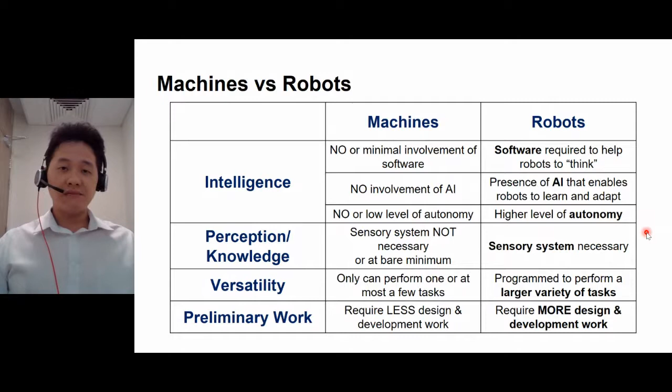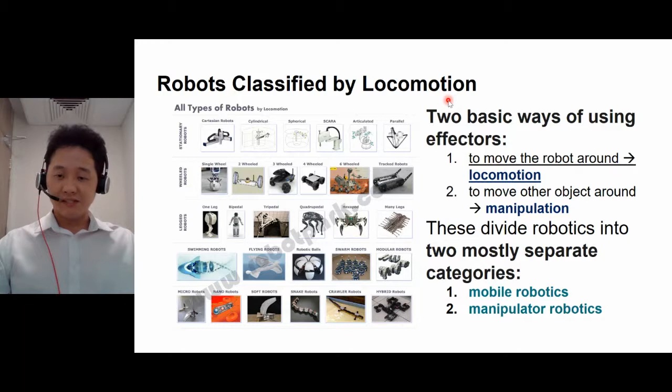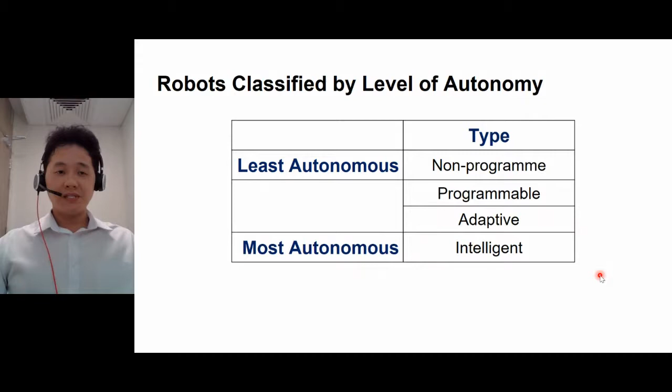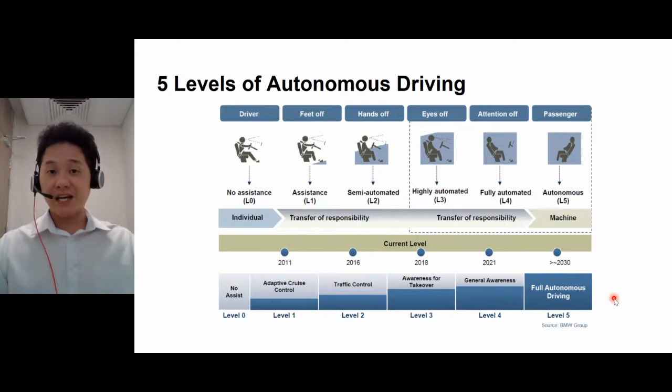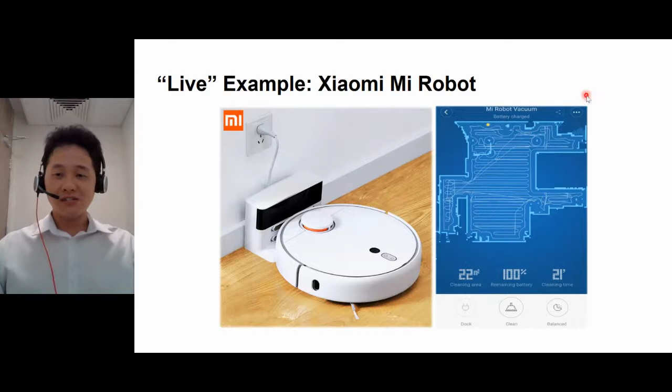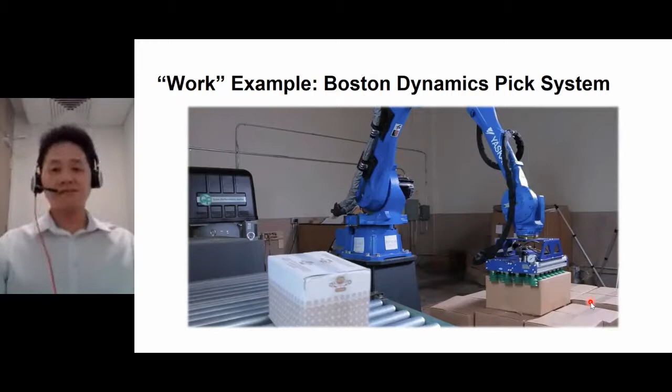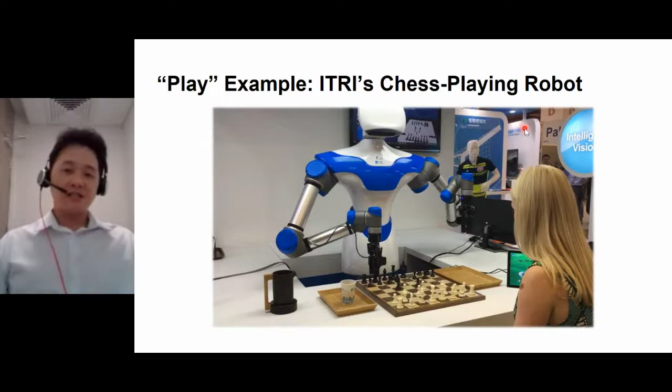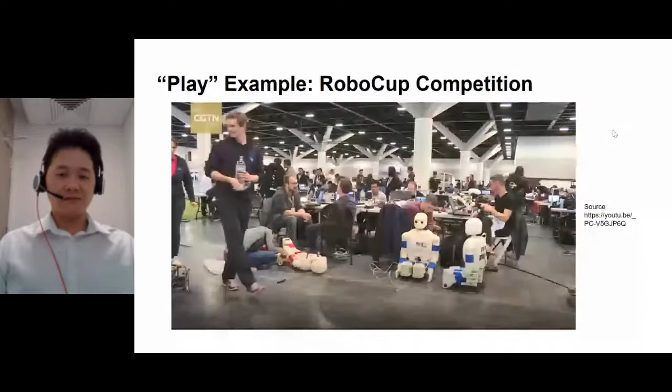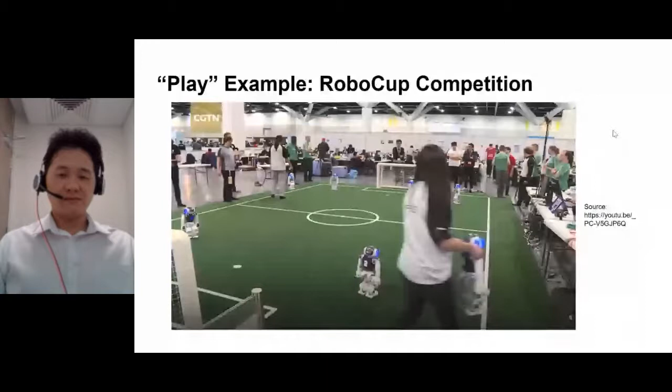All right, so I hope you enjoyed that video. Hopefully this will work out, that maybe in the near future we're able to see a group of robots playing soccer with each other, as an option compared to watching the Euro Cup or the World Cup. Maybe we'll have a robot cup on the international level.

So that's all for the present application. Right now we'll move on to the futuristic ones, in the same three categories: live, work, and play.

Under the live category, robots that can help us do our household chores. Currently it's not available, but I believe in the near future it will be possible, especially robots that can be involved in the healthcare industry and also act as a social companion to the elderly. I believe this is currently in development and hopefully it will be commercialized soon.

Last but not least, under the live category, level 5 self-driving cars. To my knowledge, Tesla recently announced that they would build a team to move towards this direction, level 5 self-driving cars. Later on I have a video to illustrate some examples of the level 5 self-driving car, but of course that's based on a science fiction video, so bear in mind.

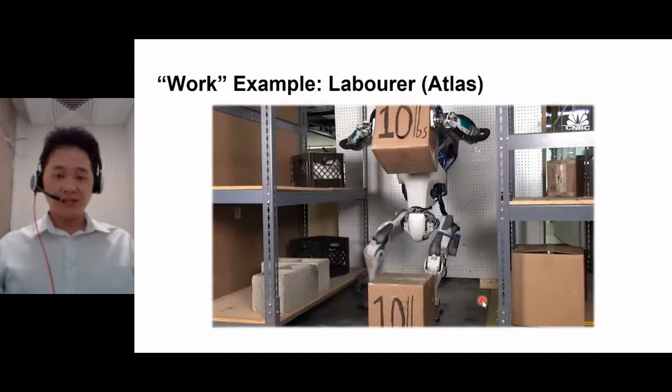A very brief synopsis is that this movie is based on a future event whereby robots replace humans in the wrestling ring. Instead of having humans in WWE or MMA events, we have robots fighting each other, and this keeps people entertained. I'm not sure whether this kind of entertainment will come out anytime soon, but hopefully it will - that would be very interesting.

So that's all for the examples of applications. Right now, just a brief introduction of some state-of-the-art technologies, to give you an overview of some of these technologies used within intelligent robots.

So firstly, the LiDAR sensor - it means Light Detection and Ranging. The LiDAR sensor helps the robot detect nearby obstacles. The mechanism is that this sensor, if it's a 360 type, will keep rotating, and while rotating it will shoot out light beams, hit objects, and receive the reflection. From this data, it calculates the distance of the object from the sensor.

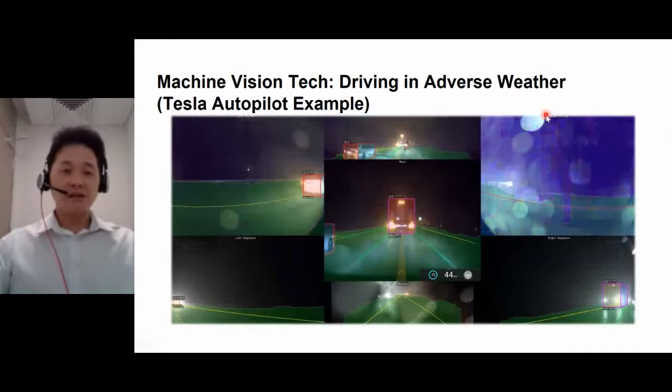Following which, we have machine vision technology. I take this example from Tesla Autopilot, an autonomous vehicle. To put the story short, Tesla has superior technology when it comes to machine vision, in the sense that it's very reliant on cameras, whose weakness is that under adverse weather conditions such as rain or darkness, the cameras most of the time will not be able to function properly. But Tesla somehow is able to solve this problem using their own algorithms.

And of course, we have brain-controlled robots. This project is done by MIT, where with an EEG sensor, the person is able to control the robot just by using his brain waves.

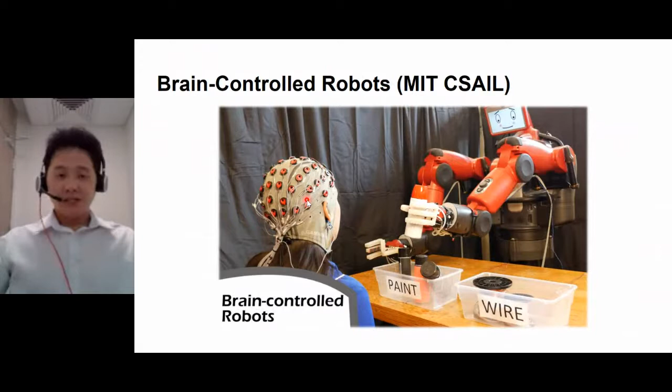For ROS, just bear in mind it's not a conventional operating system - it's not like Windows, Linux, or iOS. ROS actually runs on all these existing operating systems. And the whole idea of ROS is that we do not want to reinvent the wheel.

Which means to say if we have packages done on, for example, Ubuntu, and we want our robotic system to run on another OS, there is no need to recreate the package on that OS just to do the same functionality. With ROS, I'm still able to run my robotic system on a different OS while also being able to connect with another package running on the Ubuntu platform. So that's the beauty of ROS in summary - it does not let us reinvent the wheel.

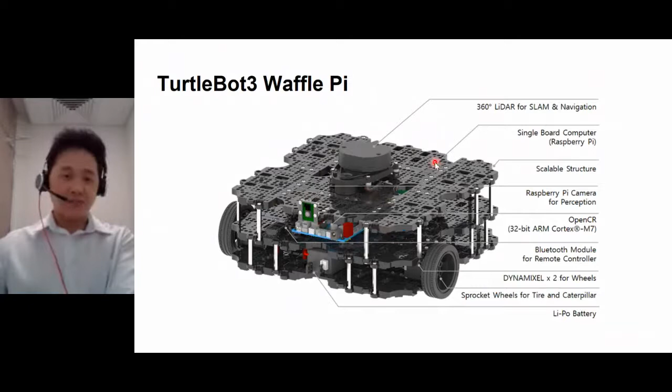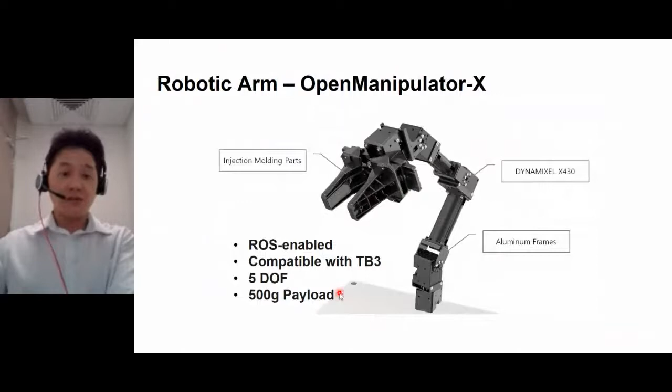And for the Open Manipulator, we have the robotic arm, which is also ROS compatible. The good thing about it is it can be attached onto the TurtleBot like this, and work as an integrated system. So effectively, this robot has the best of both worlds - able to move around as a mobile robot, while also able to manipulate objects around it. Effectively, it's a two-in-one manipulator and mobile robot in one system.

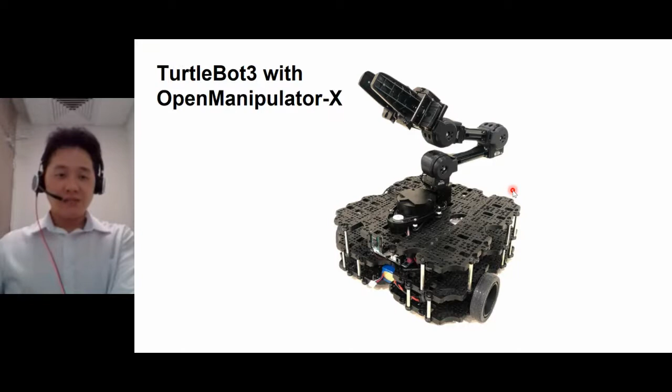So last but not least, let me run through the live virtual demonstration. But before I do that, I'd like to show a physical demo. Due to the current situation, we have recorded this to show you the physical demo of the TurtleBot. So please enjoy this video.

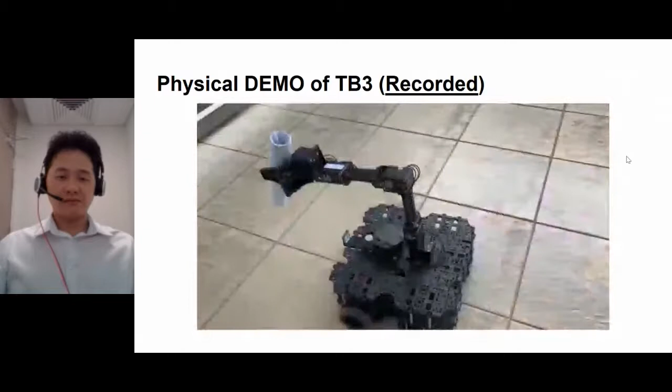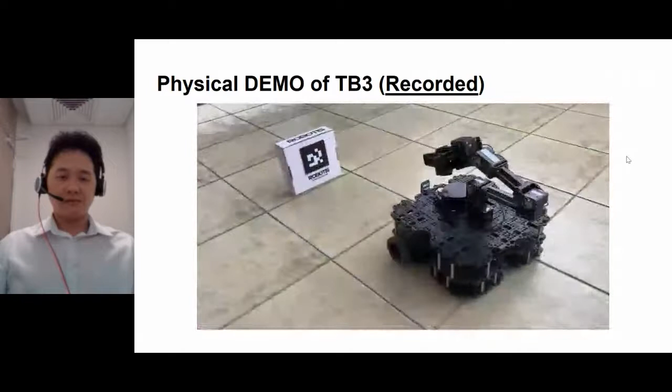Okay, so that's all for the physical demo. If there's a chance, you may come over to NUS ISS and we can give you a live physical demo. But nevertheless, right now because it's on virtual mode, we can only give you a live virtual demonstration, and just a very short demonstration over here.

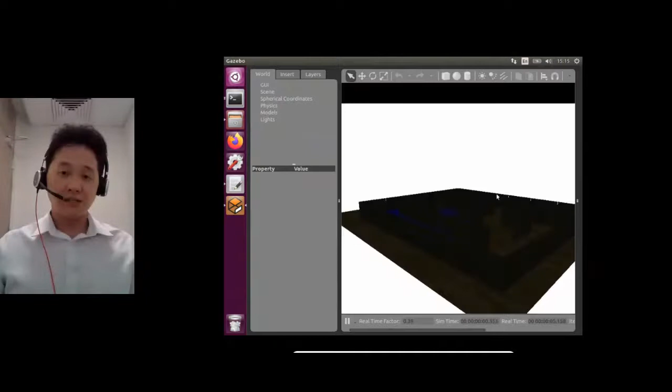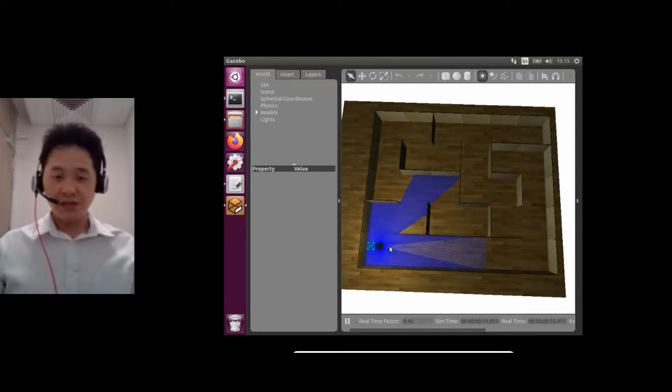Okay, so bear with me a while, I'll maybe switch on the light for a short while just for your visualization. So you see here, this is the map being generated in the Gazebo simulation software. The turtlebot is on the left, bottom left. This is the initial point, and it has to move through this maze to the top right over here, which will be the end point. And as I mentioned just now, all these blue color lines over here are the laser scans.

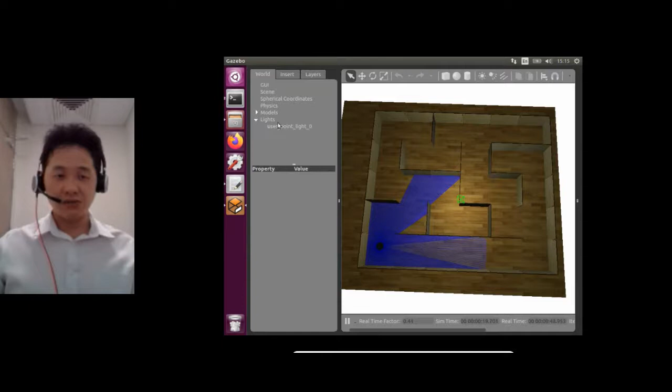Let me run the navigation node to show you that. So now I'll remove the light and I'll run the navigation node. The robot will begin to plan a path from the initial point to the end point, while at the same time avoiding any obstacles along the way.

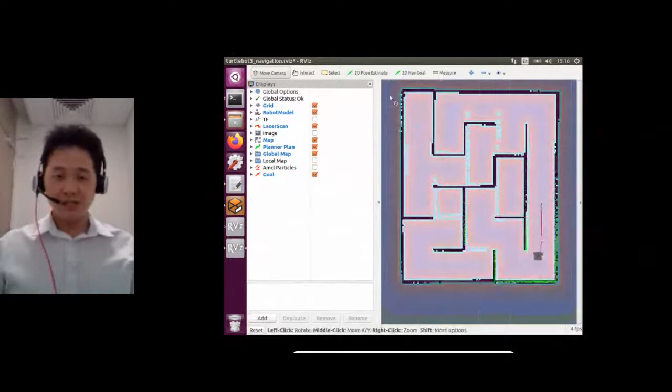And this map, as I mentioned just now, is previously generated by SLAM. And if you see over here, sorry, one minute, let me orientate this orientation. So as I mentioned, you move from the bottom left, and you will run through to the top right.

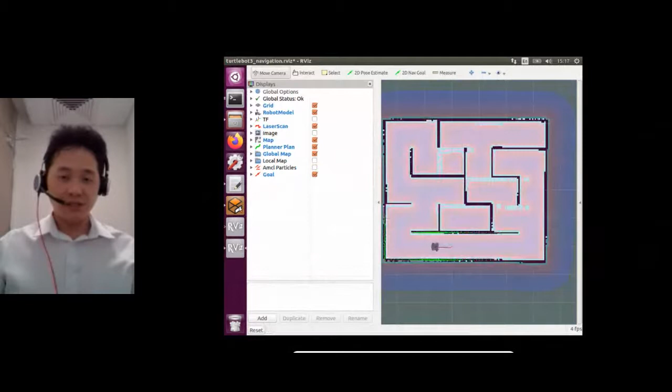So let me turn on the light just for you to visualize that. I will not wait for the robot to finish its navigation. With this, I think I'll end my demonstration. All right, thank you very much for your time, and I hope to see you soon. All right.

Are there any questions from the floor? I think maybe the last minute. Yep, maybe then we can end this session. Clarice can just take over then.